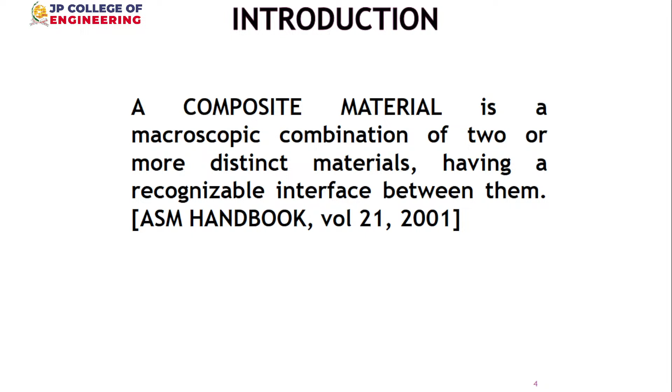Yeah, okay. So filled polymers, the meaning is here. Normally, to make a cost-effective polymer, they add some minor ingredients which will occupy the space and reduce the amount of the polymer. By doing so, you can reduce the cost. For example, the melamine dining plate is an unbreakable, polymer-based plate, where the kaolin, the clay, and the silica particles are mixed together and fused to make the plate. So this plate has some plasticity as well as withstandability for temperature and resistance to moisture. That's for very simple applications.

Whereas for some high-end applications, you have to go for selective additions of refractories to improve the thermal resistance and so on. So in this project we have selected adding fly ash. Fly ash is nothing but the residue obtained from the thermal power plant. On burning the coal, you get the residue ash, which is very fine particles. They can be graded, and an optimum quantity can be added to your polymer. By doing so, you can increase the application temperature of the polymer. That's the idea. Okay, next slide, please.

So with that idea, we have gone for the FA, the fly ash filled polymer composites, but we cannot arbitrarily put fly ash. You have to go for selective additions in selected quantity and selective size and so on. How you are going to prepare them, all are critical. This is engineering your product, so it's a kind of engineered composite. Therefore you have to do a detailed study to know the suitable size of the FA particles, what percentage or amount of particles we can put, and also we cannot simply put them and disperse them. It's not going to undergo dissolution.

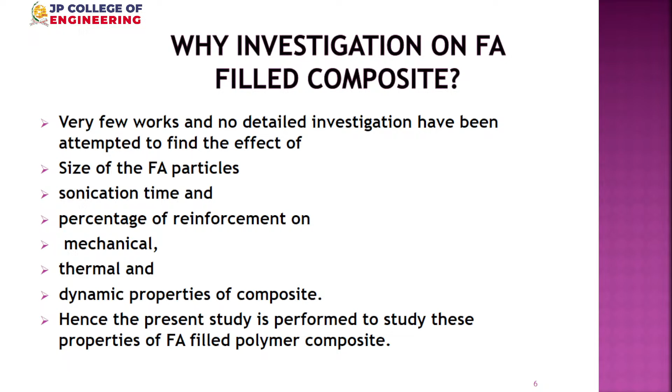So the objective is to synthesize an innovative composite with selective additions of fine particles, even submicron size nearing nano size. You cannot obtain nano-sized particles as such from the source, so you have to go for particle disintegration or comminution - you reduce the size, sieve them to get the selective grade, then add them to the resin and go for testing.

Here we tested normal tests like flexural strength and hardness, and since it's going to be used in engine cowling for automobiles, it should be able to withstand vibration. It should also resist water absorption. So all these items we have studied.

So the purpose is to obtain a suitable composite which can withstand high temperature, absorb vibrations, and resist water absorption. This is our targeted idea, and with that this composite is being made.

Next slide please - this is the methodology. We selected the application mainly for automotive engine cowling, though this could be used for other purposes also.

Normally metallic materials are used for this, but they are high in weight and will not absorb vibration, so the vehicle will always vibrate. Whereas with this composite, it is possible to have a noise-free, vibration-free travel, while also being lightweight - this was the idea.

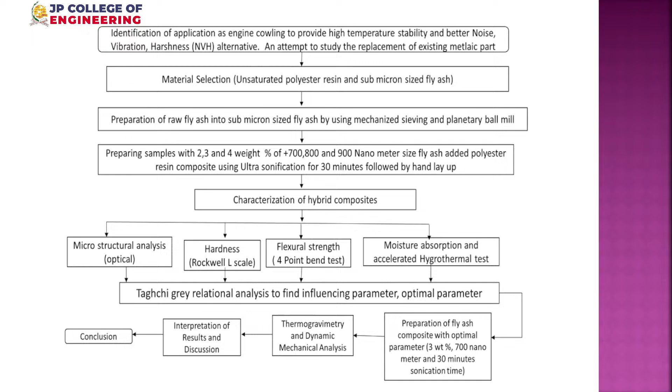The matrix we studied is polyester resin, and we prepared the fly ash particles. The ash received from our thermal power plant is coarse in size and has many different impurities. So you have to grade them and size them properly, which we obtained by high-speed ball milling at different durations to identify the size we're getting, then the particle size was analyzed using a particle size analyzer.

From our analysis we selected 3 different sizes of the fly ash particle ranging from 900 nanometer to 700 nanometer, and checked the role of particle size. We also selected 3 different weight percentage additions: 2, 3, 4. These were based on our previous literature review - you identify some range and then do further fine tuning to find what is most suitable. That's the study purpose.

The broad range was obtained from literature, where we found anything more than 5% is not suitable, and anything less than 1% also will not give the expected property. So we selected 3 ranges: 2, 3, 4. For particle size we could still go further, but our limitation is we couldn't go below about 500 nanometers - the machines we have couldn't give very low particle size. So accordingly we selected the particle size and percentage, and the composite was made.

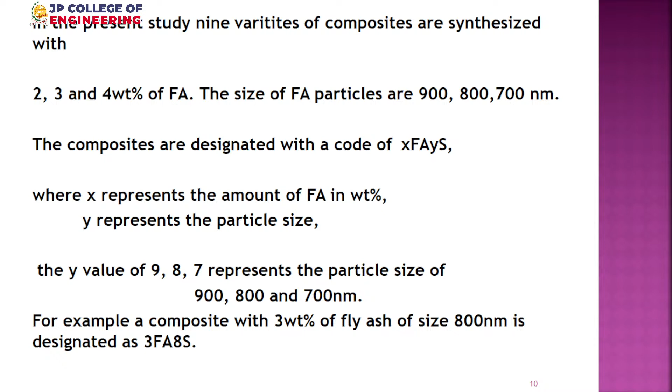Once the broad outline has been made, what kind of tests did we do? That's listed there. We measured the particle size based on the ball milling hour. We analyzed the microstructure, how the particle is distributed in the given matrix. We checked the flexural strength, hardness, water absorption at low and high temperature, and we went for thermogravimetric analysis. This tells about the degradation of the polymer at elevated temperatures - you heat the polymer and check when and how it degrades. So all this we can do.

Then the final one shown is dynamic mechanical analysis, which is a kind of testing for viscoelastic materials where stress and strain will not match together. In a metallic material, the moment you apply stress, immediate strain onsets. But in a viscoelastic material like a polymer, there is a lag between strain onset and application of stress. This lag gives a provision for damping capacity. So using dynamic mechanical analysis, we evaluate the damping behavior. These last 3 tests are very important from our application point of view.

Next slide please. This tells our preparation method. We obtained our fly ash from the Neyveli NLC plant, and then it goes to a sieve set - similar to what one uses at home for sieving rava or wheat atta, but here we have a series of sieve sets with large openings at top to very small openings at the bottom. You put the powder in and shake using a suitable sieve shaker, and it separates by size. We took the final very fine particles for further use, removing all coarse particles. From the sieve analysis we found particle sizes ranging from about 100 micron to 50 micron, but we wanted nanometer size, so we had to go for further reduction using ball milling. Next slide please.

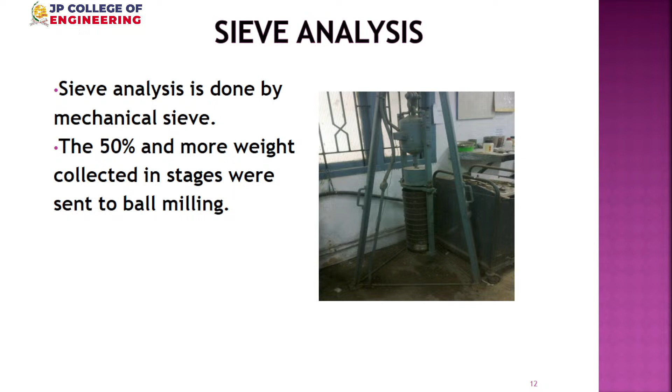Next slide please. So once we did this, it is done in almost a liquid state, some viscous liquid like castor oil or honey. It will be in the condition of like honey, where you put the particle and then stir them together. Normally if you get sick, your mom used to take honey, put some pepper powder, mix them, and give it to you. The same way we put the resin, put the fly ash particle, but for mixing we use ultrasonic vibrations.

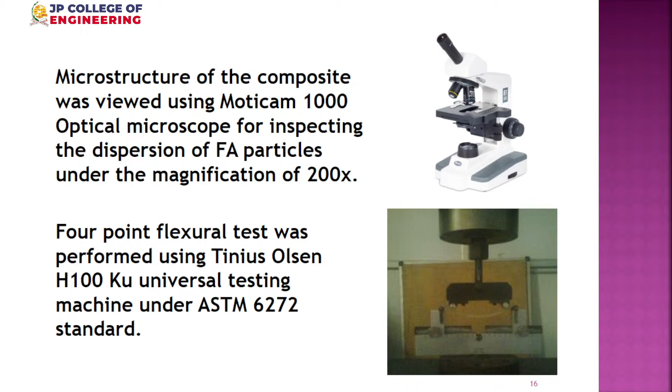So we tested first the microstructural analysis, to see how the fly ash has been distributed. For this we get small pieces with a pointed tip. Because metal will be homogeneous everywhere, you can put the indent anywhere. The moment you go for a heterogeneous material, like a cardboard or honeycomb structure, you have to put the indent over a larger area. Therefore you have to select an indenter with a larger area, like a ball indenter. Then you do the test.

So accordingly, for polymer testing, we went for the Rockwell RL scale, and the test is conducted. The bottom picture shows the testing of water absorption at normal temperature, as well as in accelerated hygrothermal conditions, that is, at elevated temperature.

We also thought about this: not only pure water, but suppose in sea coast regions, the moisture itself contains salt particles. Therefore we conducted our hygrothermal test, that is, even at boiling water, how much amount of water is being absorbed, and even at room temperature, how much water is absorbed. That water is salty, taken as real water from the sea itself. So this hygrothermal test is conducted in the bottom setup.

Next slide please. This is to check the thermal degradation. The top picture shows the thermogravimetry analyzer. Thermogravimetry means nothing but, gravity means weight, so as you increase the temperature, how the mass is going to deteriorate.

It just starts to undergo degradation - degradation means it starts burning, you can say, so it undergoes a loss in weight. So thermogravimetric study is normally done to analyze, over temperature, how the material is going to lose its weight. This is done at a selective heating rate, 10 degrees per minute, and we went from 160 degrees from room temperature, but 160 to 1000 degrees is the critical range, when it started degrading, so we carefully observed how it is going to behave.

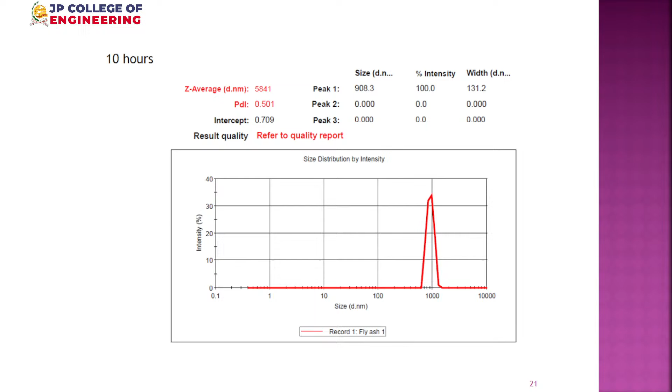So on ball milling, and then analyzing in our particle analyzer, this is after 10 hours of ball milling, we could see that we get around 900 nanometer. 1000 nanometer means almost 1 micron. So we get around 0.9 micron on 10 hours milling. Then on doubling the milling hours. Next slide, please.

Next slide, please. So therefore, for our studies, we have selected these three, serial numbers 2, 3, 4: 900, 800, and 700 nanometer size particles that we have used for our further study. Next slide, please.

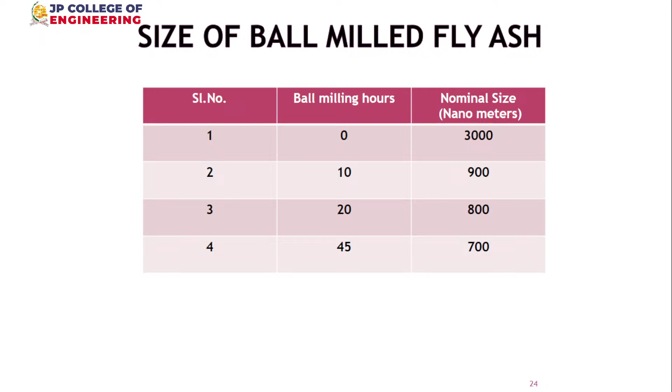So using this, we have prepared our samples. This analysis showed even some amount of larger particles, 5 micron, but you can see in the background there are small particles, submicron particles. So by grading, we removed the large size and we used only the small size particles for the preparation of the composites. Next slide, please.

Next slide, please. So therefore, from this you can say that 2 or 3% is the better one distribution-wise. 4% distribution-wise is not good. That is from the microstructural point of view. Next slide, please.

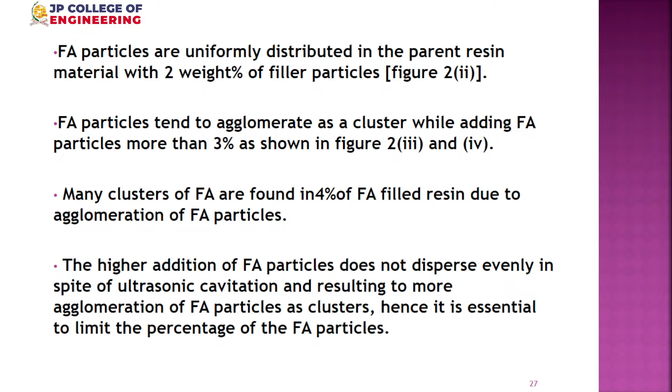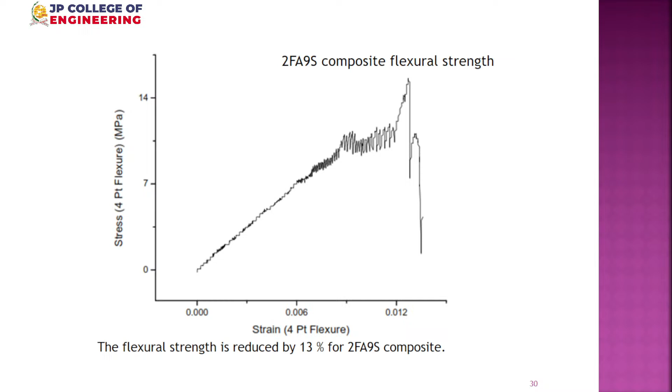This clearly shows that the particles participate in the load sharing. Finally it goes again to a peak value and then failure occurs. So one can analyze this pattern and get an idea about how the load sharing is done by the particles. Next slide, please. This is for 2%. The next one is for 3%. Here also you can see the double peak configuration in the final stages.

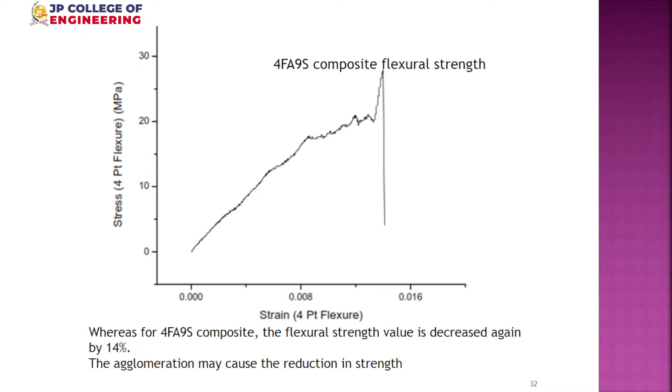Next slide, please. On checking the hardness, it goes almost uniform, whereas in flexural there is an inversion: 2 low, 3 high, again 4 is low. So one can say 3 is the optimal value. But for hardness, as you increase the percentage of fly ash, hardness continues to increase. From the hardness point of view, in the last column, 4% added, with 700 nanometer, particle fineness means hardness is more.

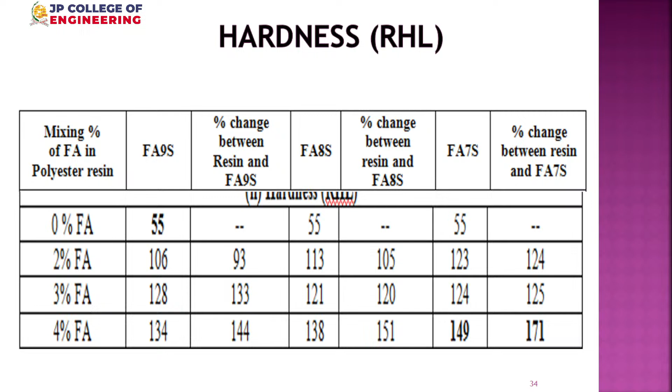That is again a good observation, which gives a high hardness value. If hardness alone is the criterion, then one can go for the 4% one, but from the strength point of view it comes down. Next slide, please. So on comparison of hardness, 2 and 3% are almost comparable, but 4 is somewhat high. However, strength-wise, the third is the better one.

Next slide, please. We went for water absorption. For water absorption, pure resin is good because it will not absorb any water; the surface is almost tightly sealed. So we could not see any water absorption in the pure resins. But the moment you add particles, there will be small voids between the particle and the resin, through which moisture gets entrapped, and the absorption increases.

But you have to go for whether it's acceptable or not. So on checking that, the 2% gives around 0.8% change in weight, whereas 4% gives around 2% change in the weight. So therefore, around 1 to 1.5 is the kind of 3%. So we say we can permit up to some 2% or something. Then we can say the better is either go for 2% or 3%. The moment you go for 4%, the water absorption is more. That is also not a good one. Next slide, please.

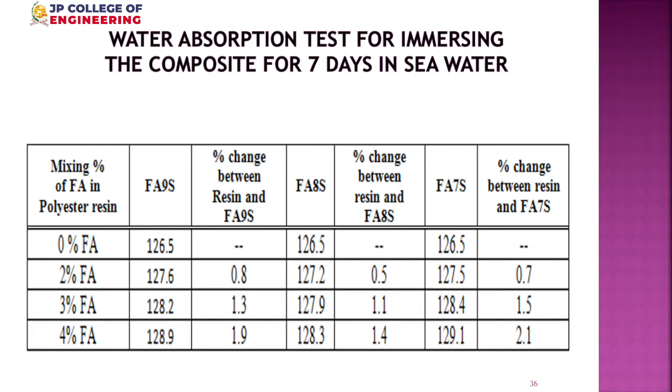So this shows even at the initial time the water pickup is not high, but in the later period the gap also somewhat widened because of soaking of the particle, then the water enters in more, therefore the water absorption increases. Next slide, please. Whatever it is, 1% to 2% is okay. So therefore, around 700 nanometer size is somewhat okay, which gives minimal water absorption.

Then we wanted to check at a high temperature, around 60 to 70 degrees, that's what is normally encountered in the bonnet of your automobile. So we heated up the seawater, put them in and checked the water absorption at high temperature. That is the accelerated hygrothermal test. Next slide, please.

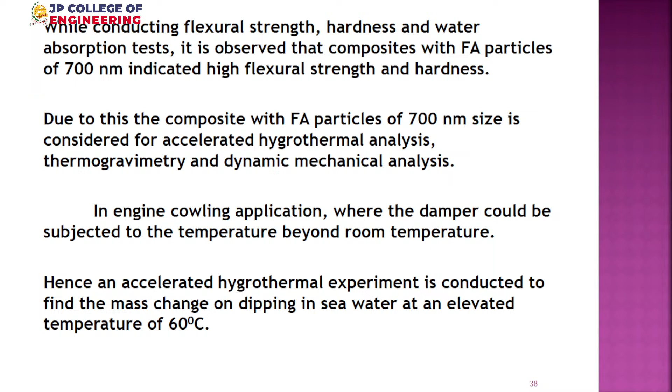So here also one can see that the moment you go for the accelerated one, even the pure resin starts showing some fissuring, and then the moisture absorption takes place. Whereas the increase in water absorption is only marginal in the case of our 2 to 3. 4% goes even beyond 3, whereas around 2 to 2.5, these 2 and 3 weight% fly ash is stabilized. 2% water absorption is okay, because pure resin is also going to have around 1.5% moisture absorption after prolonged exposure. So from the accelerated hygrothermal test, we can say our composite 2 to 3% is suitable for applications. Next slide, please.

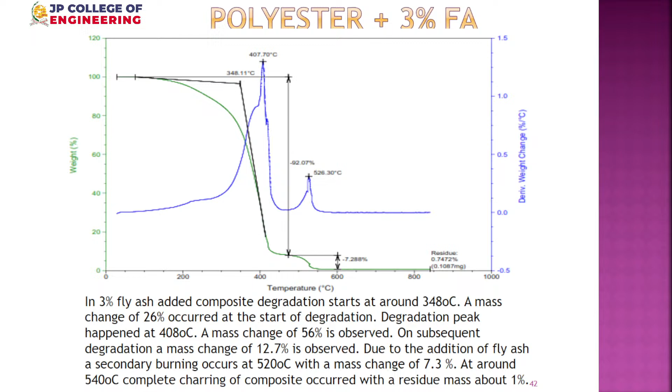For 2%, you can see that the degradation starts at 320, so 280 for our plain resin, 320 for the 2% one. Peak degradation at 395, and at almost 430 the degradation is getting completed. Next slide, please. 3%: degradation started at 348, peak at 410, and like this. So now go for the next slide, where it summarizes all the findings.

So from which you can see that the degradation start temperature is now increasing, almost around 28 to 30%, and even the peak degradation has increased to a higher value. So we can say there is around a 28% increase in the degradation start temperature in the 3% fly ash. This is a good observation. Next slide, please.

So therefore, you can say for the fly ash composite, there is a 30% improvement in the degradation temperature. That is good for this. And in particular, even 3% of particles gives better thermal stability. Next slide, please.

This is our dynamic mechanical analysis, which analyzes vibrations, and also at high temperatures how the vibration can be attenuated. That is checked by the difference between the stress and strain onset. So that is being done using our dynamic mechanical analysis.

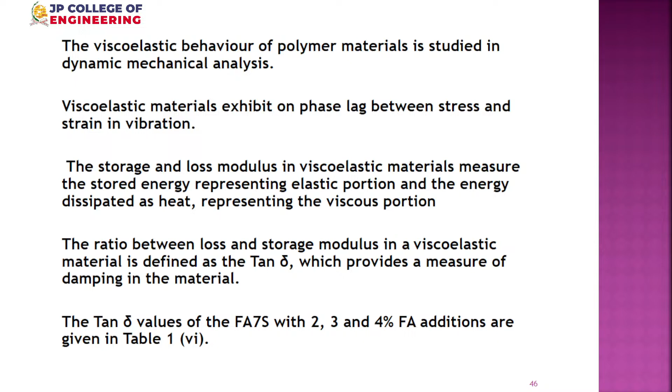Next slide, please. So the results indicate that as you increase the amount of fly ash content, the maximum damping value goes 0.38, 0.42, 0.43, 0.47, and so on. So this shows that the damping value is increasing and goes to nearing around 0.5. That is a good value for getting good damping behavior. So the fly ash additions improve the thermal stability and also improve the damping capacity. That's our final finding. Next slide, please.

Next slide. So from this work, you can say there is about a 25% improvement in damping capacity identified on adding the fly ash. Next slide, please.

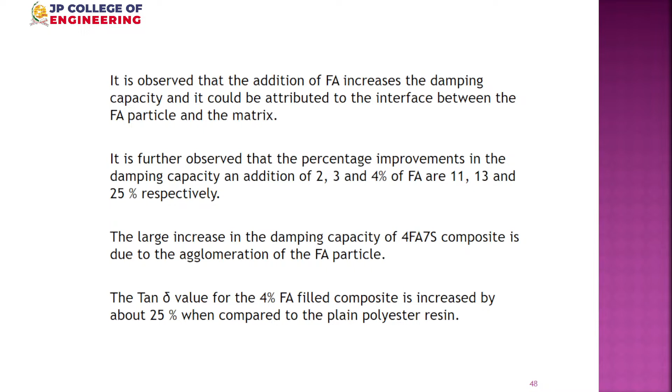So again, check how this changes with respect to temperature. Even if we go for high temperature, how the damping behavior changes, again we could notice the inversion. Therefore, better damping is observed in the 3% fly ash at all temperatures. Even at high temperature, it's also better damping. So by strength, by damping, and also minimal water absorption and high temperature stability, we felt this 3% FA with 700 nanometer gives the optimal property. Next slide, please.

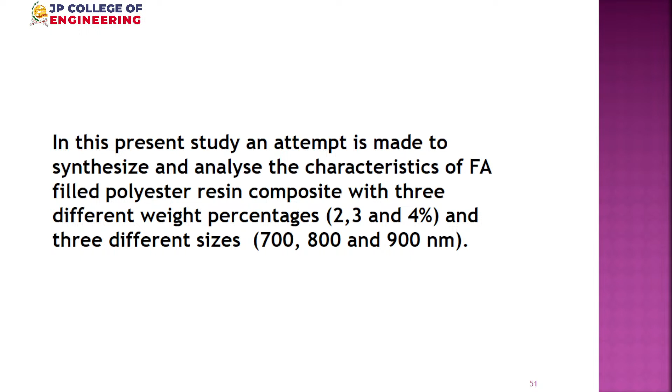So next slide. So this was the study. 2, 3, 4% and 700, 800, 900 nanometer composites have been prepared and studied. Next slide, please. Microstructure wise, 2% and 3% are better, 4% is not uniformly distributed. Flexural strength wise, 3% gives a high value. Hardness wise, 4% gives the better value. Water absorption, 4% absorbs more, that is not suitable. Next slide, please.

So the accelerated test also proved that 4% is absorbing more moisture. And thermogravimetry showed that we can increase the thermal stability to the order of even 40% and so on. And dynamic damping behavior we also observed to get high damping. So finally the 3% fly ash with 700 nanometer composite can be considered a good combination of properties and could be selected for automotive engine cowling applications.

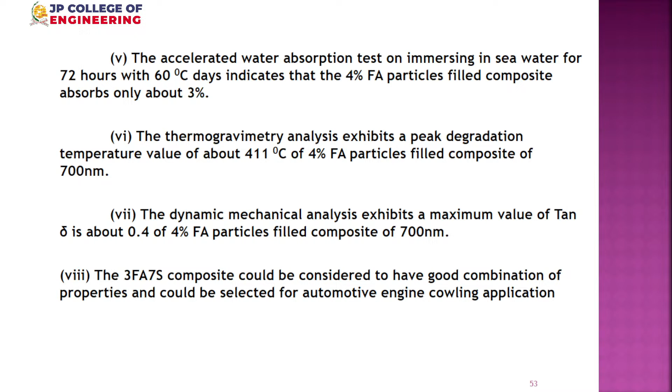So this is supported by Ford Motors. They also wanted to go for indigenization and polymer composites like this. So we made some presentations. A few papers are published in Scopus and Web of Science indexed journals, and at one place, because it is application oriented, we got an award. Okay, fine. So this is the one.

Okay, time has gone. Sorry for the delay. So I'll give a nutshell presentation for the other one, without eating the time of others. Next slide, please.

Next slide. So next is on this composite. Show the title first. Go to the title again. Yeah, previous one. Next slide, please. No, previous, don't run the previous. Yeah, keep it there.

So this is on preparing a hybrid composite. Hybrid means adding two or more reinforcements. In this case, glass fiber sometimes breaks and will not have adequate impact resistance. So we thought we can have a metal mesh also, a very fine mesh. You cannot put a coarse mesh, which will be counterproductive and will not get bonding. So we put a very fine SS mesh in the middle layer. We made a multi-layered composite and checked the low velocity impact behavior. So this was the idea.

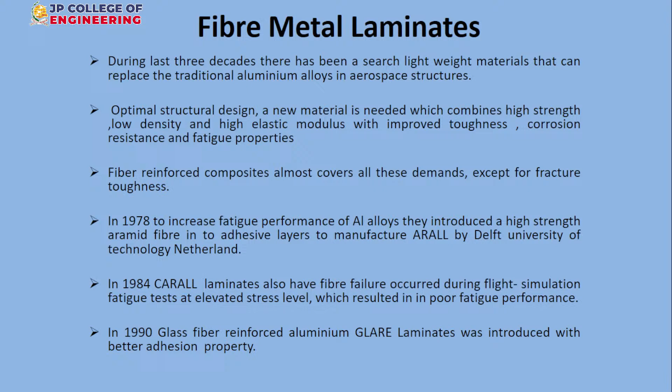Now you can run through. Go fast, right? Yeah, go. Next slide. Next slide.

This sort of hybriding, I told that. Okay, so need for... wait. Okay, so here, now you can hold it now. Yeah. So need for the studies, as I told, we have to now go for some selective preparation of composites with high impact resistance. So this was the idea by which it has been prepared.

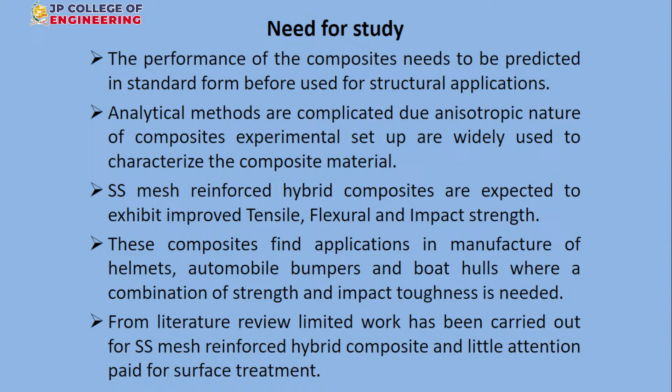Next slide, please. Next. Yeah, next also we can go next. And next. So we made some surface treatment in order to improve the bonding. That's the idea. So you have to give some surface treatment.

Already the glass fiber comes with a silane coating, but instead we checked whether to go for a very mild acid or a mild base. It's a very fine filament, so it should not affect them, otherwise it will be deleterious. So go for careful surface treatment with mild reagents. Similarly, we did some surface treatment for the stainless steel mesh, and by doing so, we can improve the adhesion between the resin and our item. That's the idea. Next slide, please.

Yeah, so this is the way in which I prepared. We placed these woven glass fiber cloths as 3 layers. The middle layer is a stainless steel mesh, and then we went for another 3 more layers of the glass fiber woven cloth. Next slide, please.

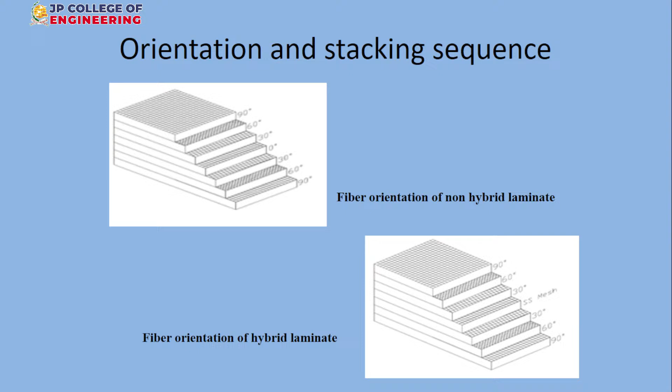Okay, so this is the 7 layered one. The middle layer we altered, like one with a stainless steel mesh. Okay, fine. Next slide, please. So 6 layers of glass fiber, and then the middle layer is a different one.

So we made almost 8 different varieties of the composites. 3 non-hybrid: only untreated fiber, then acid, and then base treated fiber. And then 5 different varieties with the stainless steel wire mesh, with different kinds of surface treatment. So all the 8 items are tested. Next slide, please.

So we have done mechanical testing: tensile test, flexural test, interlaminar shear test, impact test, and low velocity impact test. A simple Izod, and also low velocity drop height test. A hammer will fall on your laminate, then we test. So all the tests we have performed. Next slide, please.

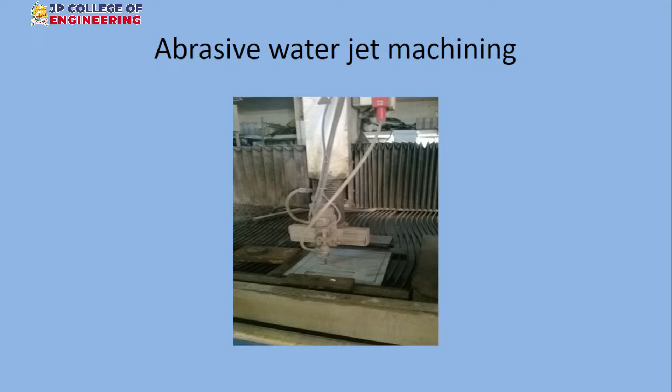So again, all the specimens should be cut by abrasive water jet. Otherwise, if you cut by a hacksaw, it will not give a good value. So this is one of the points to be noted. Next slide, please. Okay, so results, I will show. Since time is limited, 5 minutes. Okay, next slide.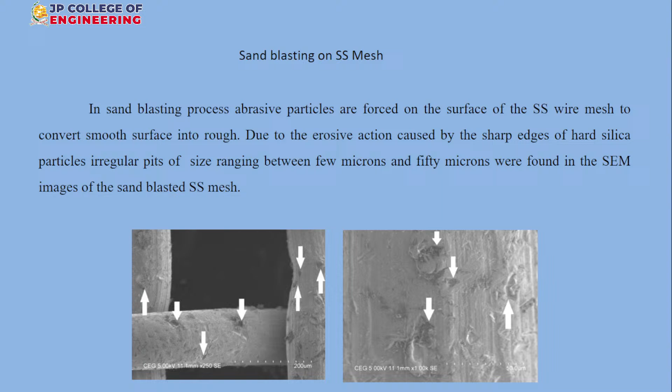For the stainless steel, again, we went for electrodissolution, by which micro pits can also be produced. Next slide. By sand blasting, using fine sand blasted over the stainless steel, we can get small pits. These pits will improve the adhesion. So once you do the surface treatment, then we made our composites. Next slide, please. Next slide.

Okay, so we tested the tensile strength. Next slide. We tested the flexural strength. Interlaminar shear strength. Next slide. Impact test. Okay, next slide.

So you are given many different tests: mathematics, English, physics, chemistry, and so on. Finally, you get a rank. How? You sum all the items, make a ranking, and from that find the best student. Like that, since we have 4 or 5 tests, we took a parameter by weighted average method and found which gives the optimal combination of properties.

Like you are ranked though you studied many different subjects, the same way we use a weighted average method called strength factor, and using it we found which is the best one. Next slide, please.

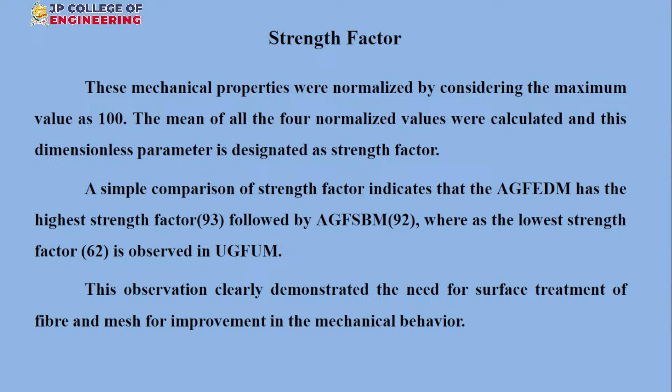So the last column is strength factor. From this, if you see the 93 mark, this guy, number 7, is an acid treated glass fiber with electrodissolution mesh, which scored 93. The next one, acid treated glass fiber with a sandblasted mesh, scored 92. So these two have scored well, and the bottom is around 62 mark, which is an untreated glass fiber one.

So like that you can combine them. Though we have many parameters, by using weighted average we can single out who is using the optimal combination, who is rank 1.

Next slide please. So to quickly run through, low velocity impact: by dropping a hammer we can check how damage occurs. In this loop, displacement goes up to some maximum and then returns. Return means it's all elastic collision, no damage at all. These are at 3 meters per second.

But the moment you go for higher impact velocity, at 5 meters per second, some of them get perforated and will not return. The elliptical picture shows no retention, elasticity, no damage, whereas the open one shows more damage. Like that you can get an analysis.

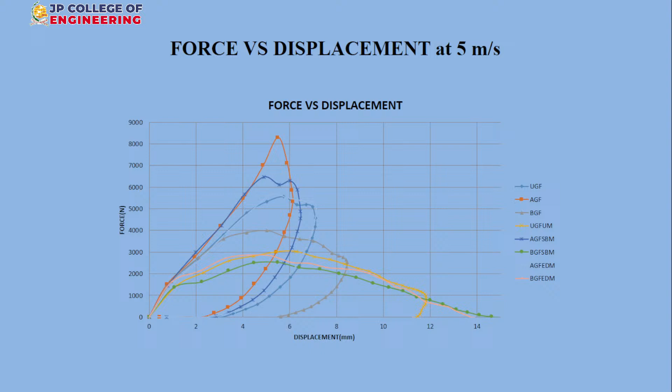From the energy absorption point of view, you can say which gives the better result, but we show that directly through fractography.

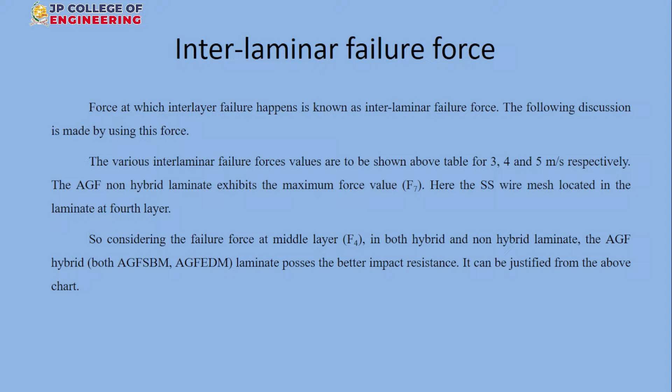So we did an analysis and found that the glass fiber and sand mesh, particularly the SS mesh with some surface treatment, gives a better value.

So all the specimens, right from the right hand side being the untreated one to the left hand side being the superior one. You can see even without the metal mesh it gets perforated, as you can see the hole. But on the left, all the 3 specimens with the SS mesh give better resistance to the impact. You can see this on the top side as well as the bottom side.

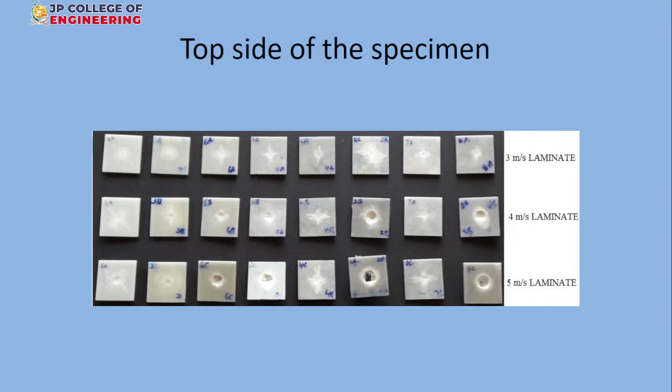Now among these items, the perforated ones are the untreated ones, whereas the unperforated one is the treated SS mesh one.

So from this we can say that the treatment, particularly acid treated one, as well as electrodissolution, gives a better combination of properties, with high impact strength also there.

We'll skip this one, this also we got. So this is quick, only 5 minutes.

So therefore from the previous one, by using a very fine mesh, you see a coarse mesh is useless. A very fine mesh with the surface treated one in the middle layer, with top and bottom layers built using a selective glass fiber, or you can even place your mesh at suitable locations where you want to do the fastening.

Exactly, now Bharat Benz, the automotive vehicle manufacturer, uses this because they make the bumper out of glass fiber. But while fastening them, if you put a bolt there, then the bolt region breaks. So we told them to place a patch, an SS mesh inside, then you can get better fabrication capability. Another option is you can entirely make the bumper using this.

So it is being under consideration. But as of now, the Bharat Benz vehicle, the lorry, you can see that the front bumper in the bolted region has SS wire mesh impregnated inside, so that it will not give way there. Okay, fine.

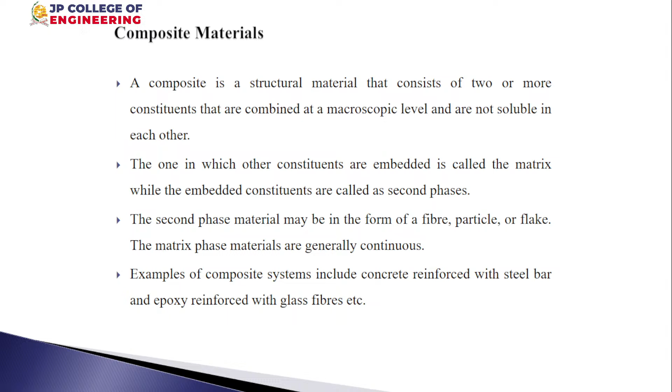But here that is aluminum honeycomb structure. The technology has now been developed with greater precision. But we want to make such structures for the resin-based one. When you go for the resin-based honeycomb structure, it will not bond excellently well with the facing sheet because there's only line contact. So we want to go for a different kind of configuration.

So the inner core can be of different types of configuration. Next slide, please.

So the inner core can even be a foam, or you can put truss members, or it can be a corrugated one. So we modified the concept of a truss type, but not just a truss like a bar or beam. Instead we went for a novel idea.

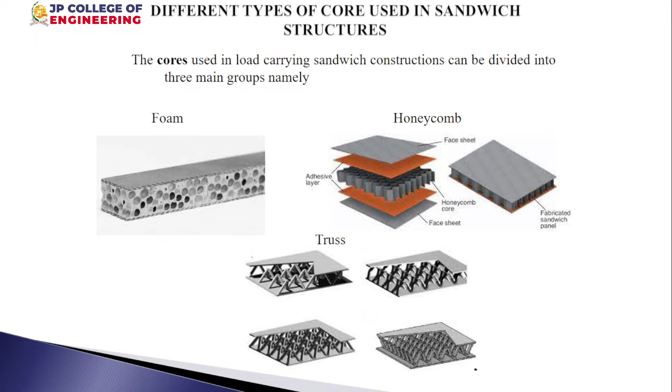Nowadays people want to go for even, you can see your cardboard box packing, like this. And this kind of structure can be made even for the partition wall for skyscraper buildings, where it will not participate in load sharing, only partition application. Right now people use aluminum frames or plywood, but that can be replaced by our idea for partition walls and also packing materials.

Next slide. So the problem is difficulty in manufacturing like this. We went for an innovative type of the inner core.

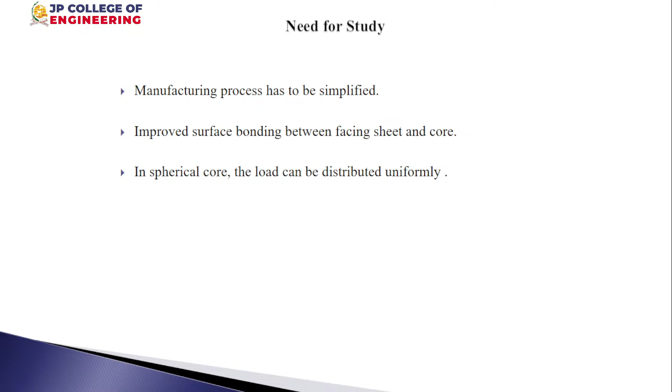Next slide. I will quickly run through. So various tests we have performed: flexural test, compression, and also the drop height test.

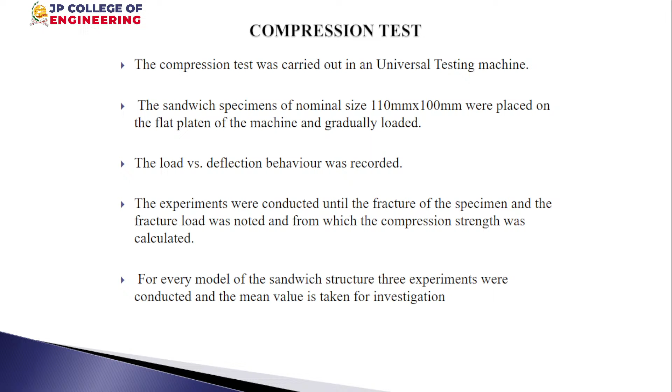So for the compression test, we made the kind of specimen and put it in a UTM and just compressed it down.

So among which gives a better one, we made 4 different varieties, as I told you: regular, inverted, interlocked, like that. So with various pitching distances, we identified the interlocked one gives a higher compression.

So this is under compression. We compared with other published literature, and we have a better result like this.

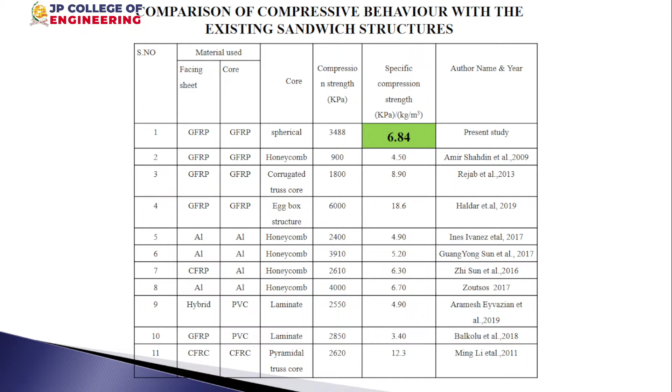Okay, flexural test—you do flexural test, but you have to go for 4-point bend test. We conducted 3 different configurations, using three point as well as 4-point test, took the average value, and gave some suggestions.

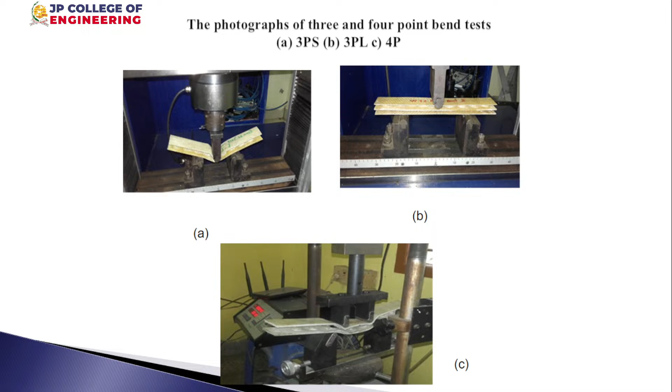This is the flexural test. Three point flexural test, and this is 4-point with 2 support points and 2 load points. The bottom shows the 4-point flexural test setup.

Using suitable formulas, we arrived at the flexural stiffness and some other parameters. We don't want to discuss this in detail, let's go quickly.

So out of these, we could find which configuration gives better results. The flexural strength of the interlocked one gives better performance. We took 3 different cases, and the interlocked (IL) configuration gave higher flexural stiffness.

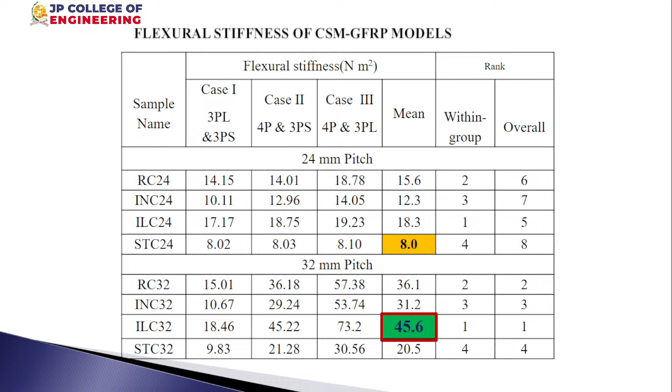We differentiated in many different ways, and across all measures, the interlocked 32 model gives better values.

This shows the various types of failure during flexural testing—debonding, core crushing, and other failure types which occur. We noticed all of these during testing.

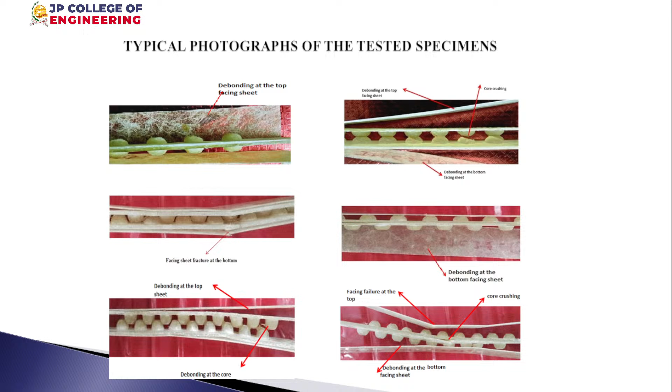This is the low velocity impact test, as I mentioned, one of the important tests. The specimen is fitted in place, and from a certain height, an impactor falls on the subject so we can understand how the impact energy is absorbed.

The impact test is one of the interesting tests, from which we can understand how the fracture progresses.

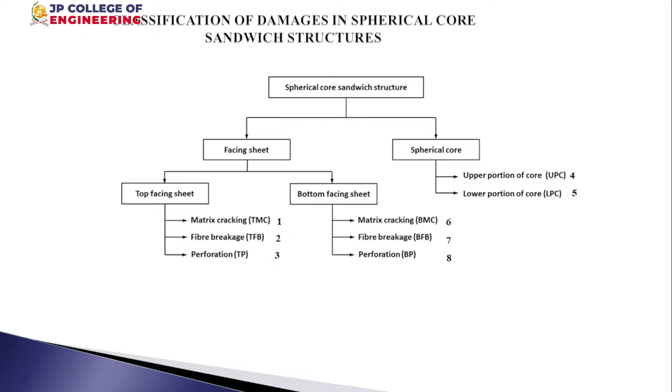Each peak can be associated with a particular kind of failure, and not all failures occur in all conditions. The ideal structure shows minimal fracture but still absorbs the energy—that's the main idea behind the impact tests.

From this we found many different kinds of analysis. This is detailed doctoral work, so I'm not going into all the detail.

This analysis has also been done using ultrasonics, which gives an idea through the acoustic emission technique, by which the damage can be analyzed.

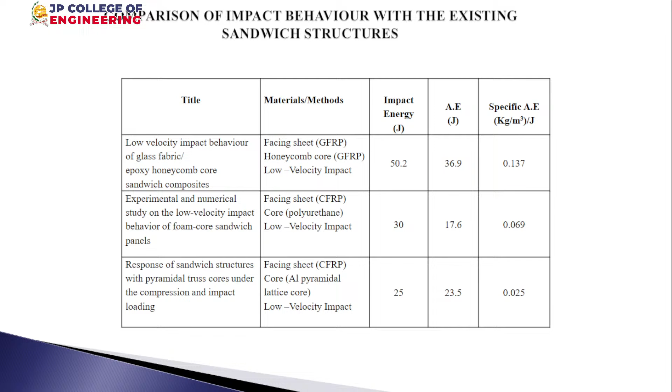From this we can see there should be an optimal combination of strength and capability to absorb energy. For example, consider a helmet during a collision—the helmet should absorb the energy.

It can undergo fracture, no problem, but the energy should not be transferred to your skull. It's better the helmet fractures rather than your skull fracturing. Therefore we should not look for a very sturdy helmet; instead it should be able to absorb the impact. That's the idea behind developing a hollow structure—in the worst case of any collision, it will absorb the energy so it's not transmitted to the subject housed within it.

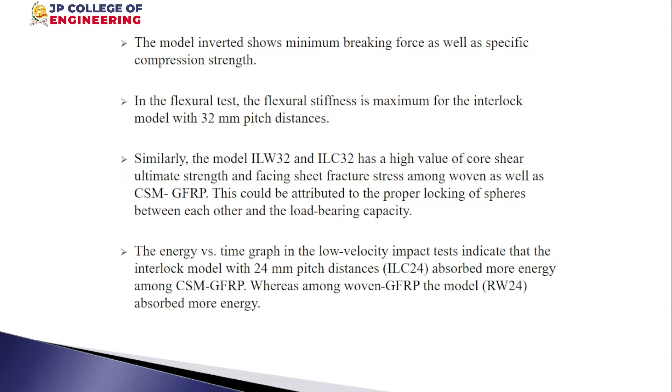So with that, let's move to the last slide—I'm sorry, we took a long time.

Hold it, one minute. I'm sorry, we lost almost 10 minutes of time.

That's why I could not make a detailed presentation. The idea is we prepared some kind of innovative composites with a targeted idea. The starting one was a fly ash filled one, with the targeted idea of improved thermal resistance and improved damping capacity. We were able to achieve them. Then again we made a kind of stainless steel wire meshed one.

You cannot arbitrarily put them. You have to engineer them. You have to go for surface preparation, bonding them, testing them, so that they could withstand very high impacts. The final one, a lightweight sandwich structure, which could be used for many different normal applications, even for your container boxes. Even right now, card boxes are very popularly used.

But if you see even your television sets or all your gadgets, they come with a kind of outside casing. But if it falls down, the casing should be able to absorb energy. So therefore, for some vital items, the outer casing could consist of a hollow structure, but that should be able to absorb the energy. So from helmets to partition walls or even automotive body panels, the sandwich structure could be used.

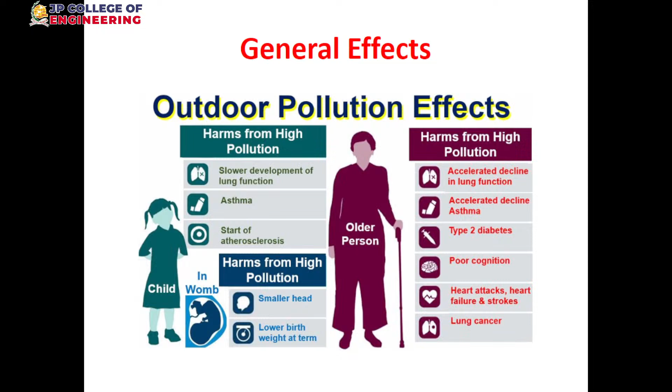So whenever we think of the development of a new project, as a civil engineer, maybe after getting your graduation, you are going to become a full engineer, either in the department of PWD or highway, or in the irrigation departments, agriculture department, in whatever project you are going to be involved with,

especially the construction of major buildings, apartments, commercial buildings, highways, railways, bridges, flyovers, dam structures, irrigation projects, power plants, thermal power stations, nuclear power stations, the water supply system, wastewater system. If you think of all these projects, of course there are certain advantages and disadvantages, positive and negative impacts.

Some impacts will be short term, some long term; some localized, some widespread; some reversible, some irreversible. Moreover, certain impacts will exist due to the construction phase or the operation phase. Some impacts are expected in future, which are referred to as anticipated impacts. So considering all these impacts, especially the negative, irreversible, and long-term impacts, we have to think of maintaining this system properly.

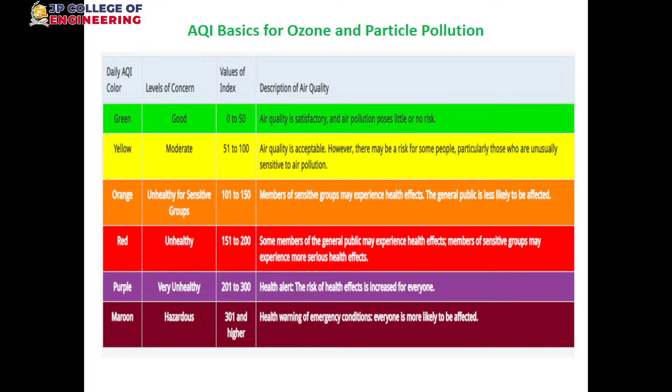Next slide, please. So there are 6 levels of health concern as we see here, considering the air quality index especially, right? This we discussed already. 0 to 50 is considered as good. Air quality index in the range of 51 to 100 is considered as moderate, and so on.

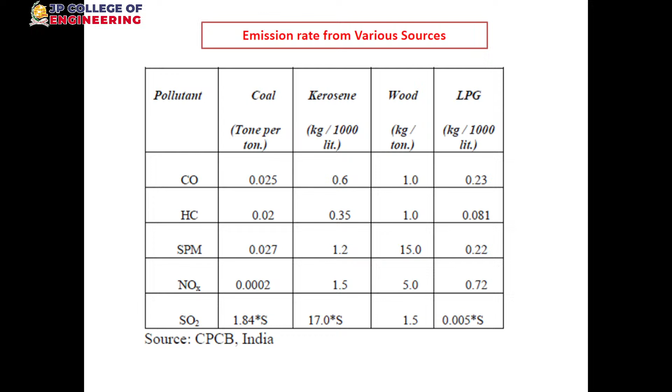Next, please. So in addition to the air quality as well as the water quality, mainly we have to focus on the condition of the soil. So when we think about the soil condition, the main standard is what's called the irrigation standard. The irrigation standard especially depends on the salinity condition.

Please make a note that the salinity condition is mainly due to the dissolved solids, especially the potentially toxic trace elements, some of the herbicides, especially the sodium level. A high value of sodium in water damages some of the sensitive crops, beans, the turf. So some very sensitive crops will be affected due to high sodium in water. Such an impact is technically referred to as sodium phytotoxicity.

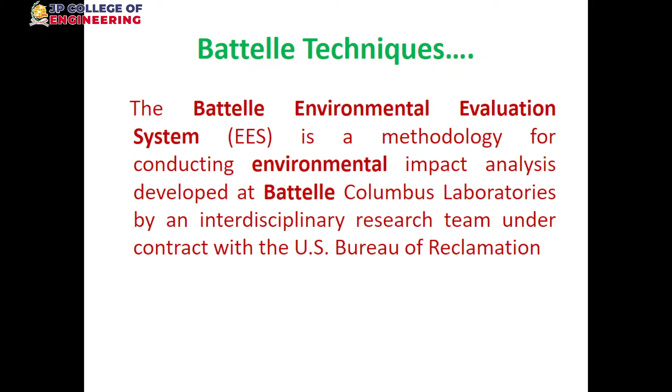So the Battelle technique, the Battelle Environmental Evaluation System, EES. It is a methodology for conducting environmental impact analysis or environmental impact assessment, developed at Battelle Columbus Laboratory in the US by an interdisciplinary research team under contract with the US Bureau of Reclamation. EES is a scientific technology. Next slide, please. It was implemented to ascertain environmental quality in general.

So the widely used EES is mainly for water resource planning, air quality determination, groundwater analysis, and for the evaluation of the project impact to select specific alternatives. So we say that certain specific alternatives.

So let me give you a small example. Even in our southern part, especially in Tirunelveli district, Kudankulam, we have the nuclear power station, right? In another region, in Neyveli, you have the thermal power plant. If you consider the thermal power plant especially, the basic raw material they are using is coal and oil. By burning the coal or the oil, we produce electricity, right? So that is the positive impact.

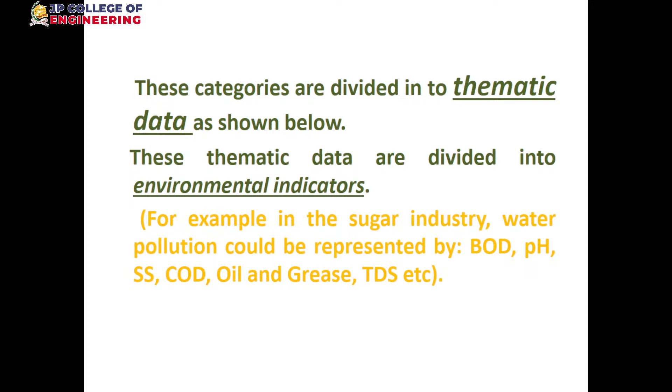What is the level of oil and grease? What is the level of TDS? This must be ascertained by that particular industry or the stakeholder of those industries using this system, called BEES. So once the environmental indicators are chosen, we can follow up with the remaining steps: step 1, step 2, and step 3.

At the first step, the goal of the method is to transform environmental indicators into environmental quality. The notation table defines the range shown from 0 to 1, where 0 indicates poor quality and 1 indicates good quality. That is the environmental indicator, indicating directly the condition of water or air in terms of environmental quality.

The second step involves a total of 1,000 points. What point? Point refers to the parameter importance unit, simply called PIU, which is shared among all the indicators, as I'll show in the next slide. They reflect the relative importance of each parameter. For example, for pH there is a parameter importance unit, and for BOD there is a value of PIU, already assigned by Battelle Lab of Columbus in the US. They have given us the PIU values for all the fundamental parameters. The overall PIU values are considered as 1,000 points.

That must be noted: the comparison between the decisions is made with the help of the term called environmental impact unit, EIU. So by knowing the value of EIU, we can compare what is the level of impact before and after the implementation of the project.

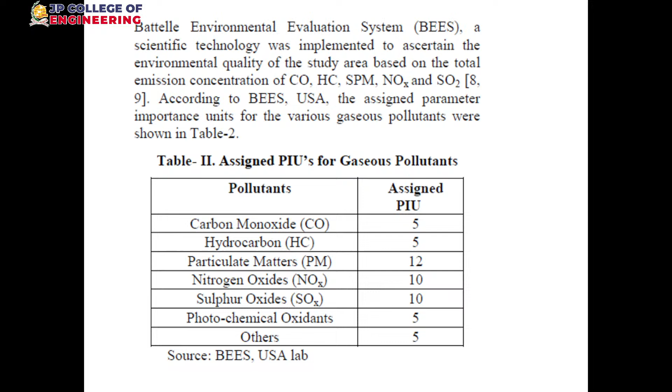Mathematically, it is represented as the sum of EIU, that is environmental impact unit, which is equal to the sum of environmental quality considering all the individual parameters, where small i is the individual parameter, multiplied by parameter importance unit, minus the sum of environmental quality of individual parameters multiplied by the parameter importance unit. So EIU is the environmental impact unit. EQI number 1 is environmental quality for an indicator, maybe pH or BOD, with the project. And number 2, EQI without the project — with the project and without the project, or before implementation of the project or after implementation of the project. So based on that, the environmental impact unit is calculated in terms of parameter importance unit.

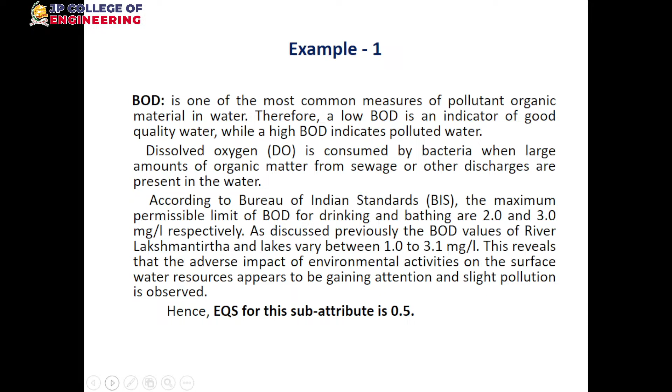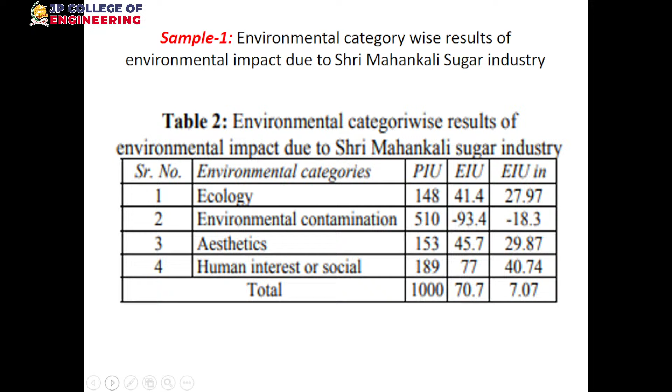So we can pass the next two slides, sir. Can pass. Next. Next, please. It's already discussed. Yeah. So yeah, please come back. One slide back.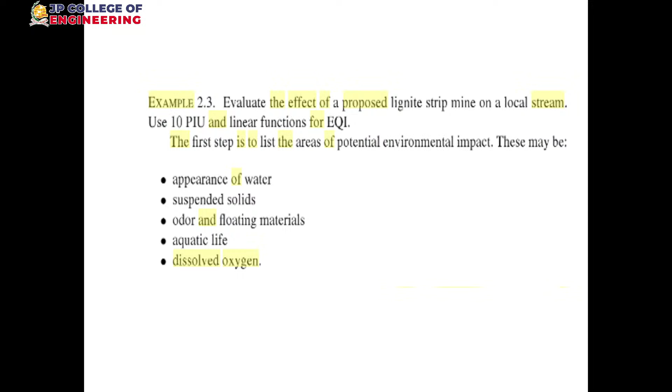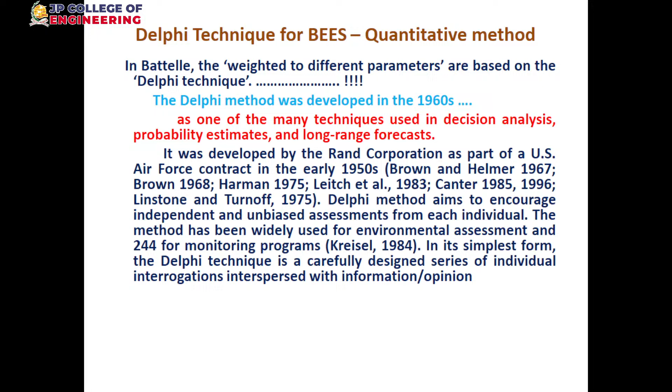So during the planning stage itself, EIA must be conducted through public participation and community engagement. As a part of EIA, public hearing and community engagement are very important. No government or organization, even a municipality, can initiate any project all of a sudden. For example, in Kanyakumari district, when the government initiated the construction of the Marthandam flyover, there were different opinions from the public.